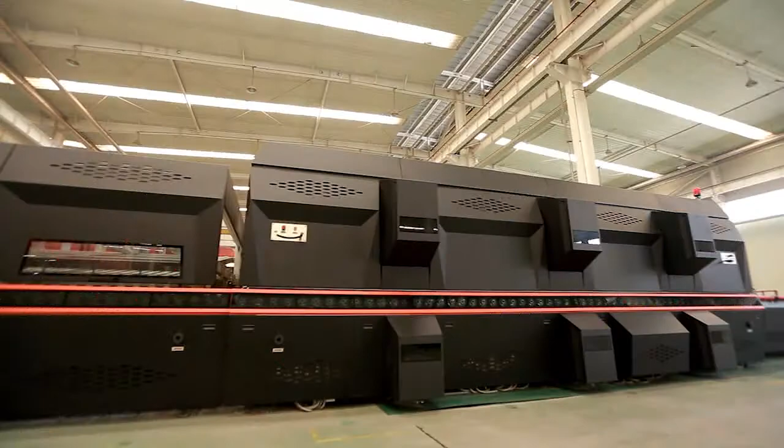As a worldwide leading manufacturer in the fields of glass deep processing equipment and deep processed glass, North Glass sincerely introduces our T-Series, Top Series glass tempering furnace to you, which integrates North Glass's 20 years of professional experience.

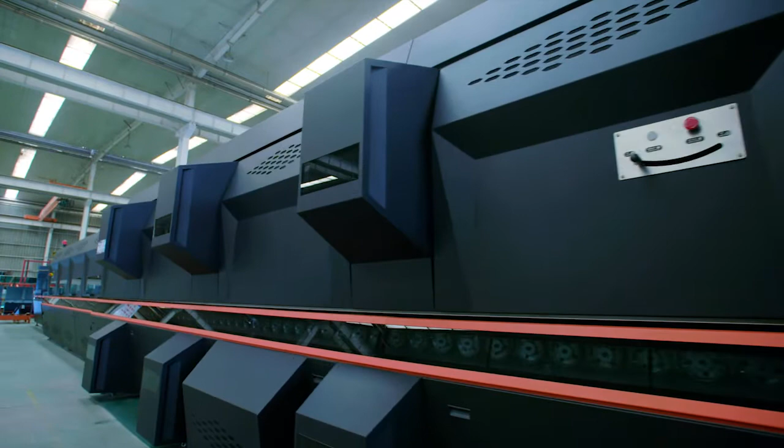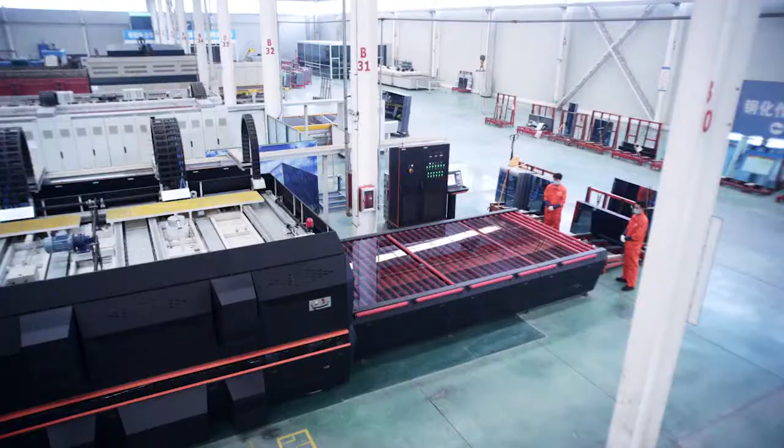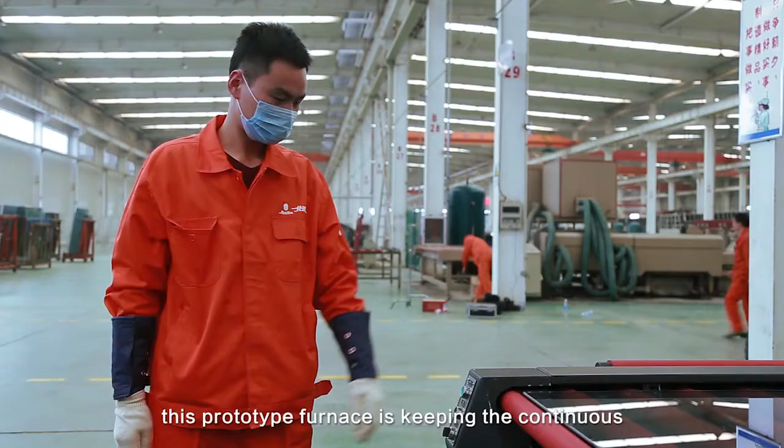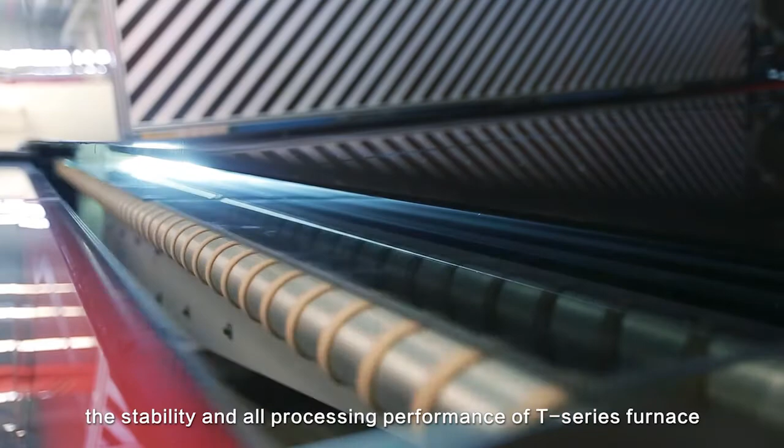North Glass started the research and development of the T-Series glass tempering furnace in April 2014. The first prototype furnace was produced and shown in April 2015. Since June 2015, this prototype furnace has been in continuous commercial production testing at the Luoyang North Glass production base. According to this verification test, the stability and all processing performance of the T-Series furnace have reached the expected targets.

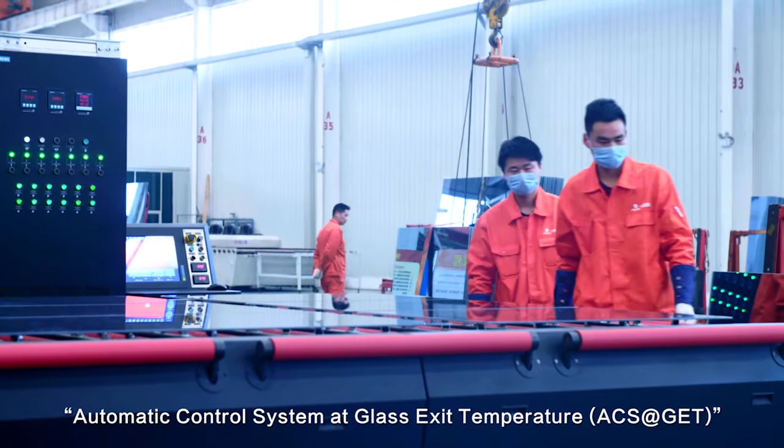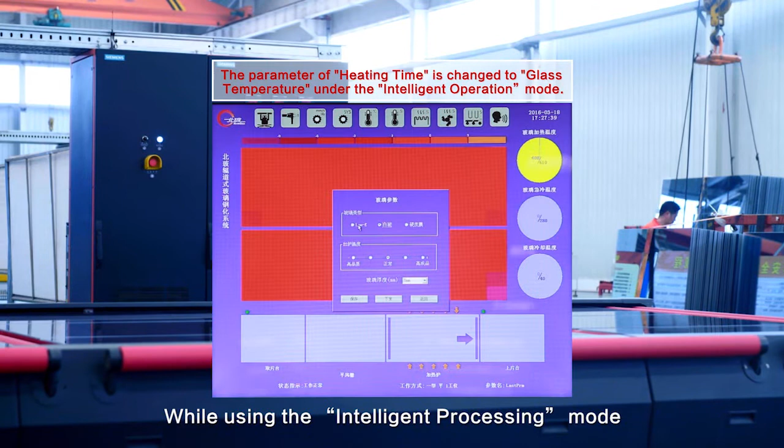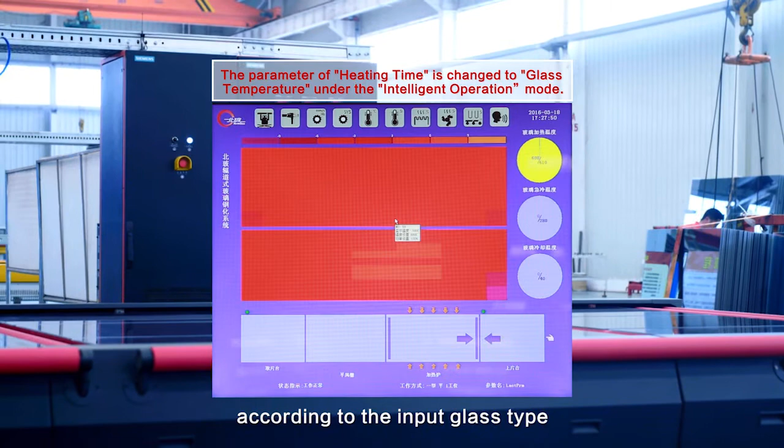The T-Series furnace is equipped with a new concept, automatic control system at glass exit temperature, ACS at GET, which witnesses a technical renovation of heating control for tempered glass. While using the intelligent processing mode, the automatic control system will be activated. The glass processing parameters will be automatically set up according to the input glass type, thickness, size, and quality orientation.

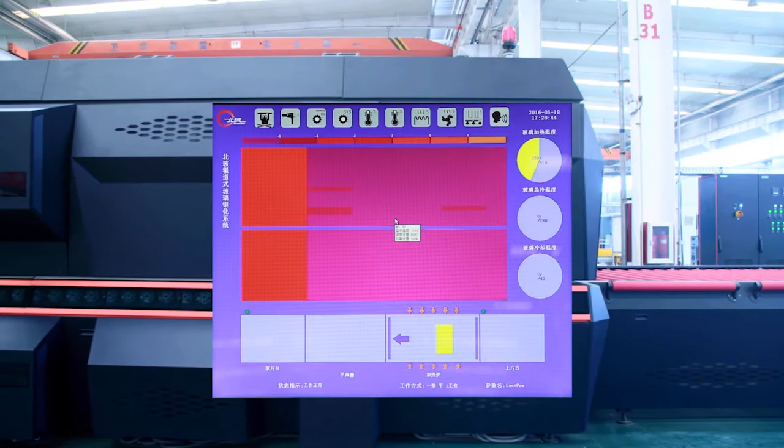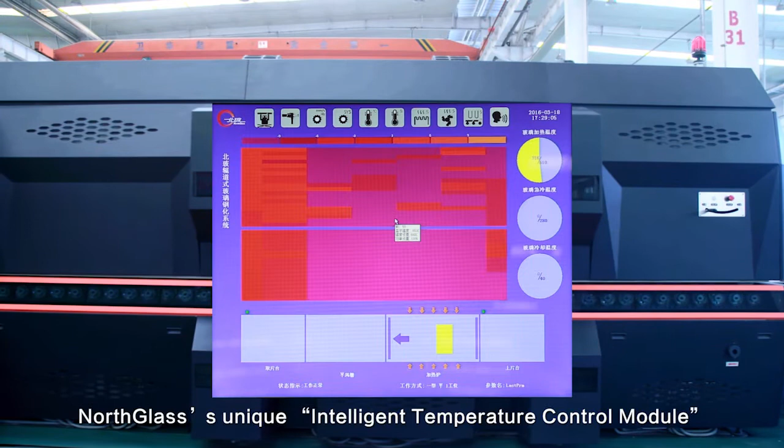NorthGlass's unique intelligent temperature control module can quickly and accurately detect and control the temperature distribution inside the heating chamber.

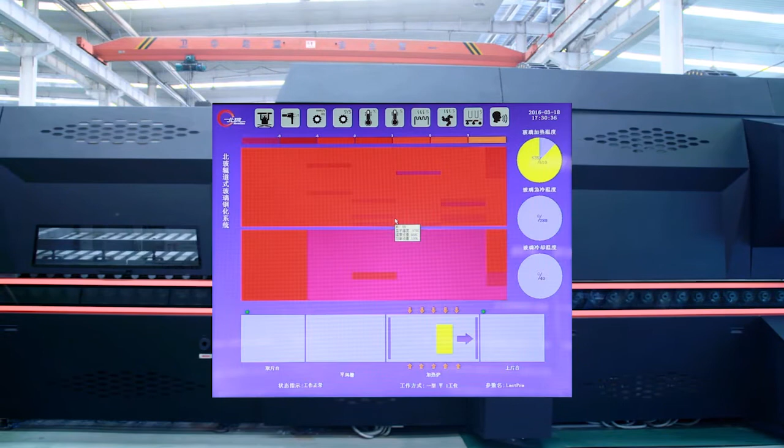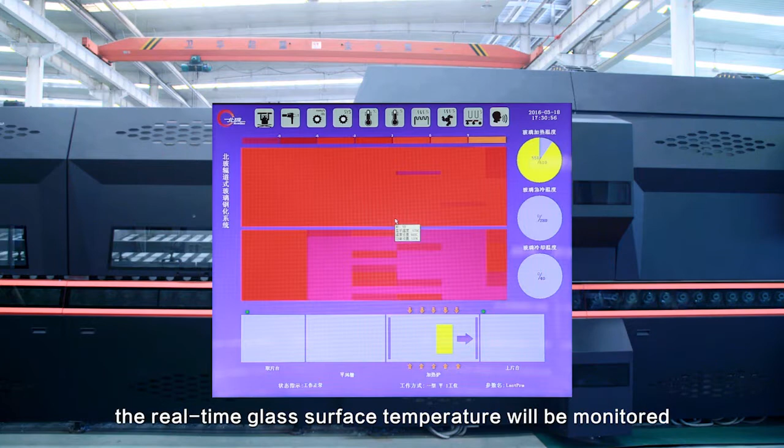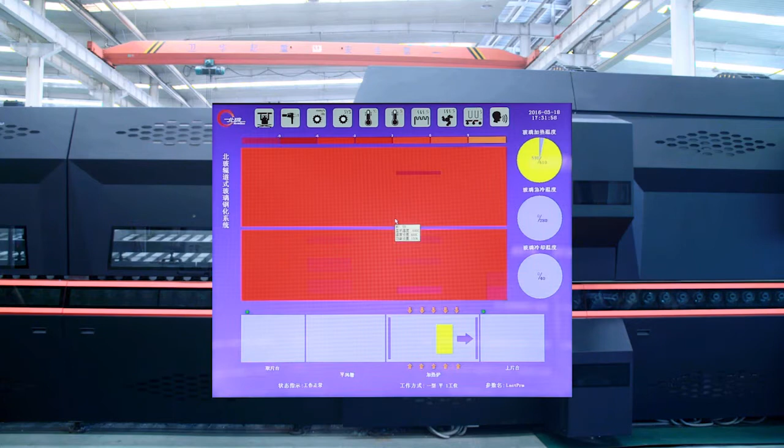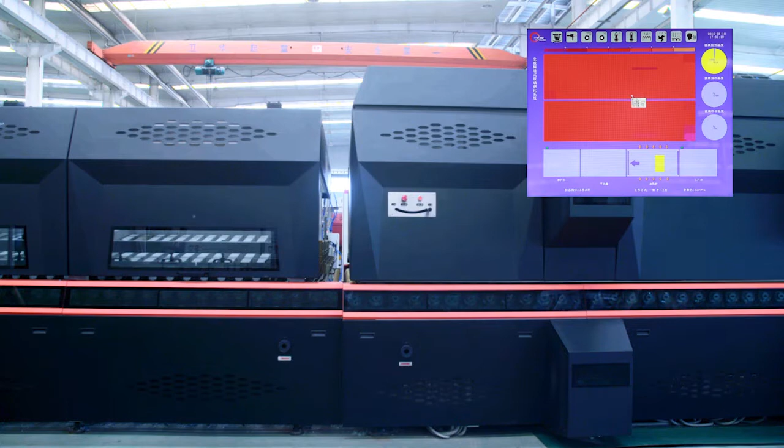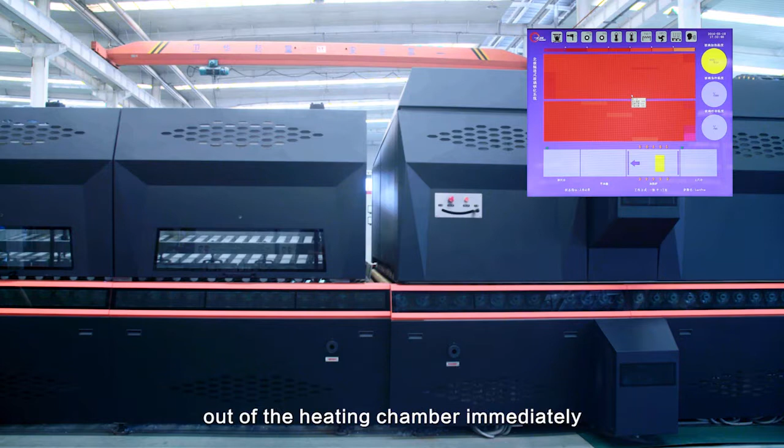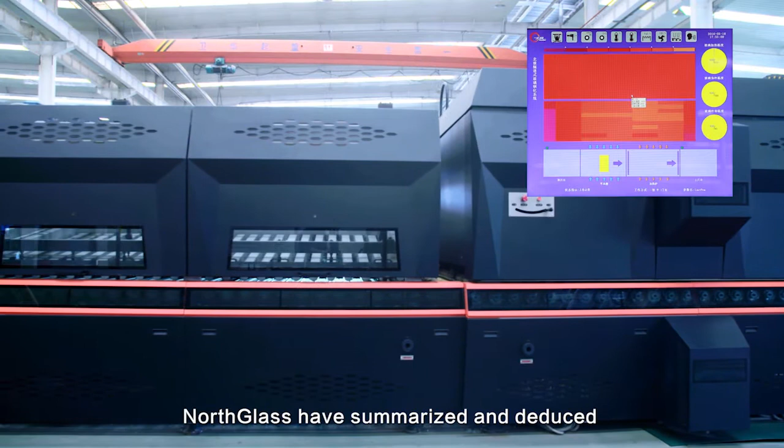When the glass surface temperature reaches the ideal one, the heating will be stopped and the glass will be moved out of the heating chamber immediately. Based on 20 years of experience accumulation and 1 year of trials, NorthGlass has summarized and deduced the function formula for temperature prediction. By using this function formula and real-time glass temperature monitoring, the glass will be moved out of the heating chamber exactly at the expected temperature.

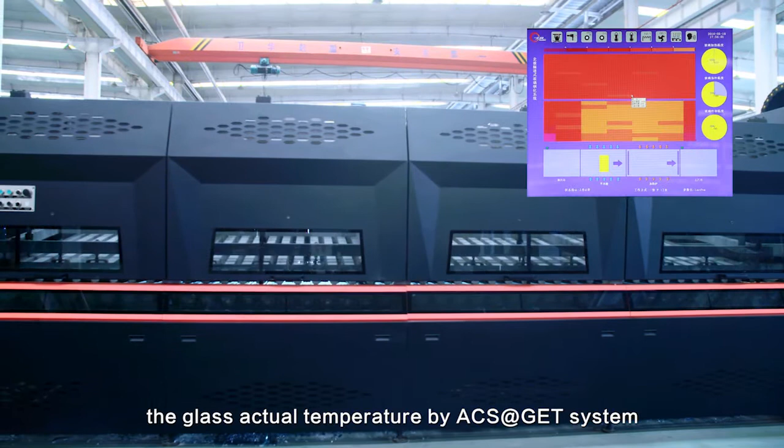Compared with the traditional heating control method, which works indirectly via setting an empirical heating time, the heating control via the glass's actual temperature by the ACS at GET system is direct and more accurate, which can significantly reduce the trouble and cost caused by repeated adjustments to find the best heating time. More importantly, the ACS at GET system can avoid heating deviation due to glass thickness tolerance, thereby significantly improving glass quality and production yield rate.

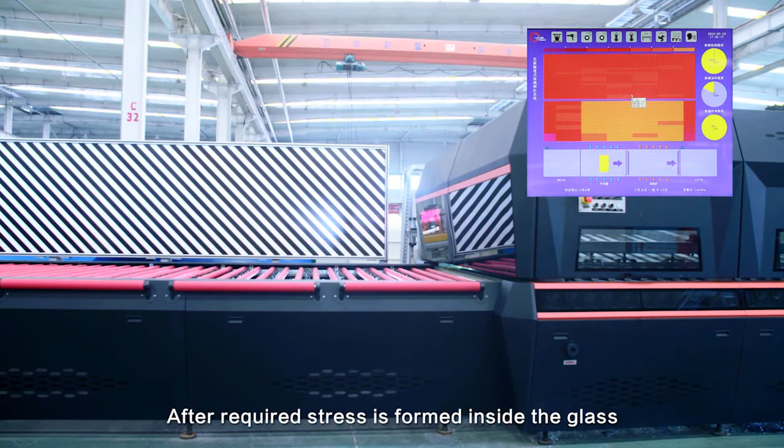The temperature detecting sensor on the quenching wall can instantly detect the actual glass surface temperature. After the required stress is formed inside the glass, the ACS at GET system will quickly adjust the blower inverter frequency to supply more efficient cooling, thus minimizing energy consumption while guaranteeing glass quality. When the glass surface temperature decreases to 40 degrees Celsius, the cooling process is finished.

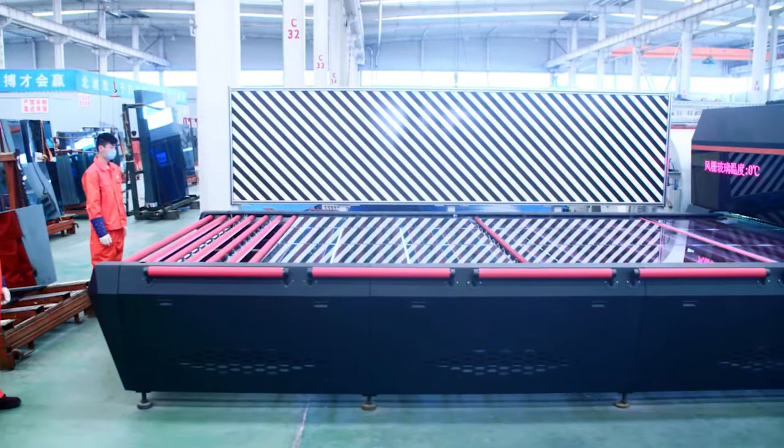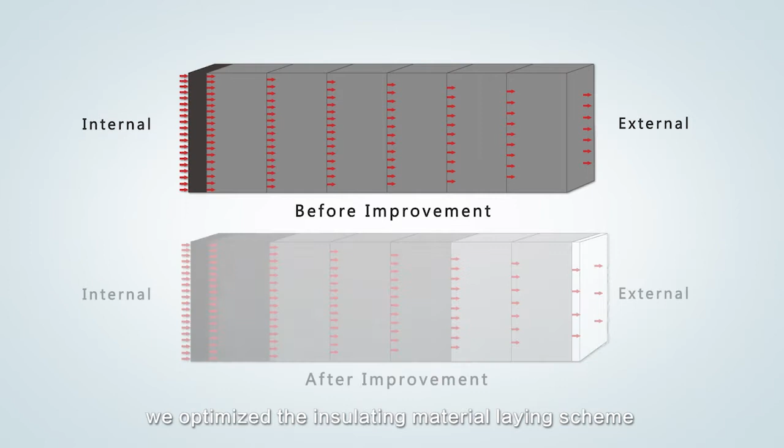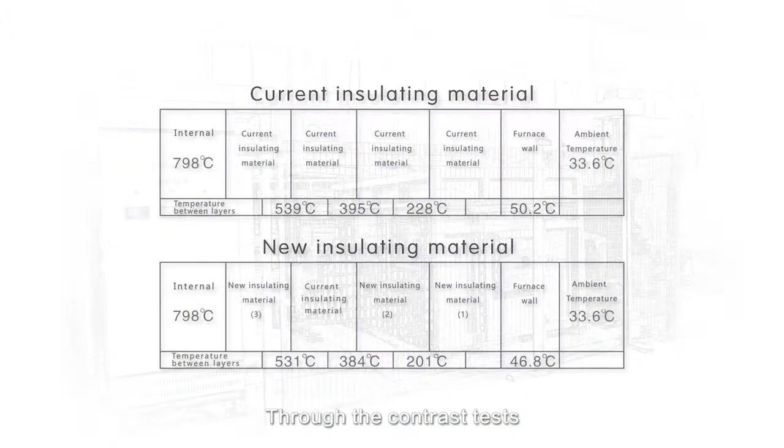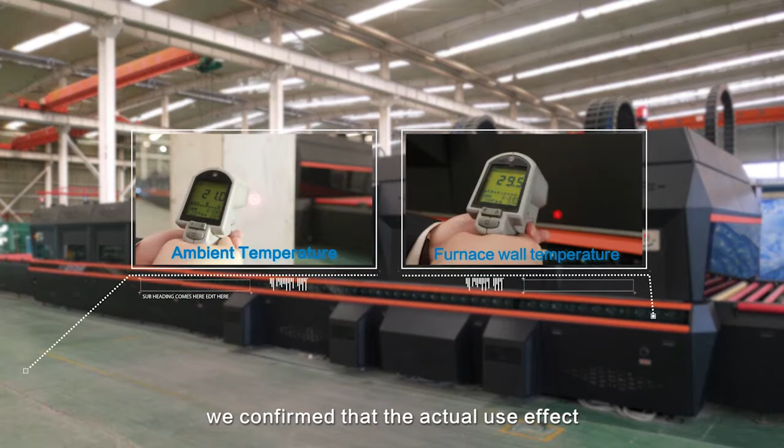Through thermal field analysis, we optimized the insulating material laying scheme with different performance layers to maximize the heat insulating effect. Through contrast tests, we measured the actual temperature data, which further verified our assumption. After statistical calculations, we confirmed that the actual use effect of the T-Series furnace had reached the expected target, which could help the user save an annual electricity cost of about $5,000.

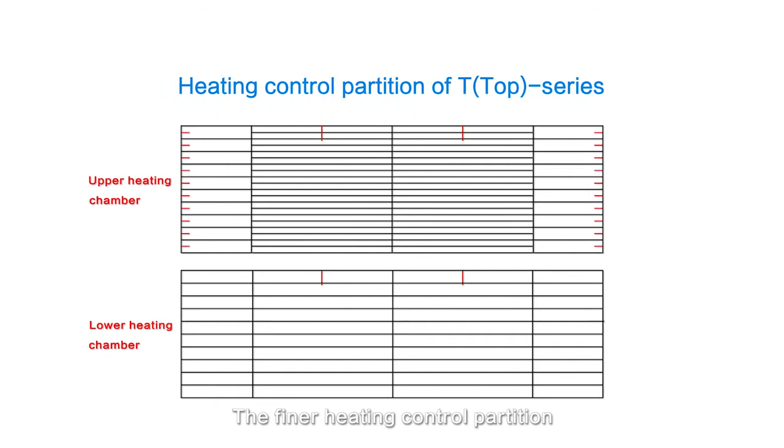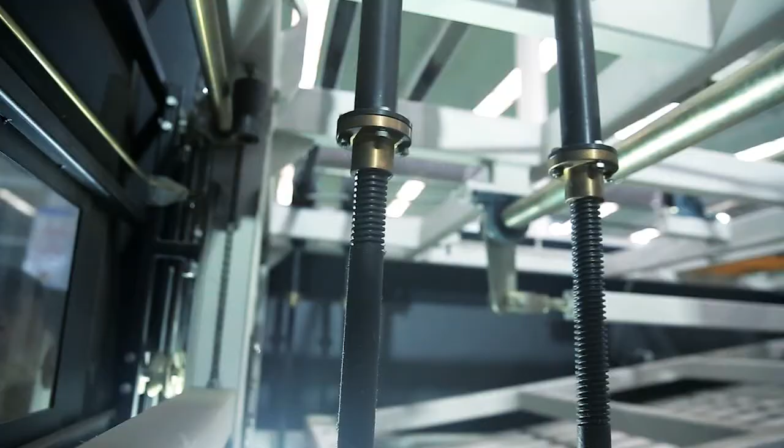The finer heating control partition makes the heating control react more quickly and the glass temperature control more accurate. Through fluid simulation, we optimized the quench wall design by eliminating air turbulence, making the quenching air pressure more even. The new design of the swing lid screw nut mechanism can improve the stability of glass flatness while guaranteeing the lightest iridescence.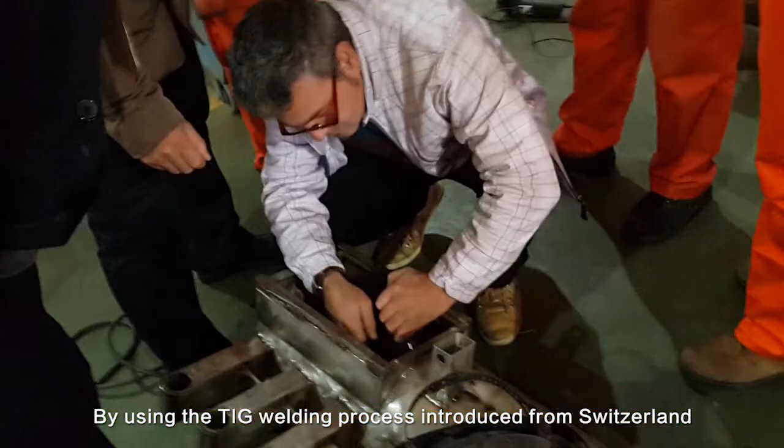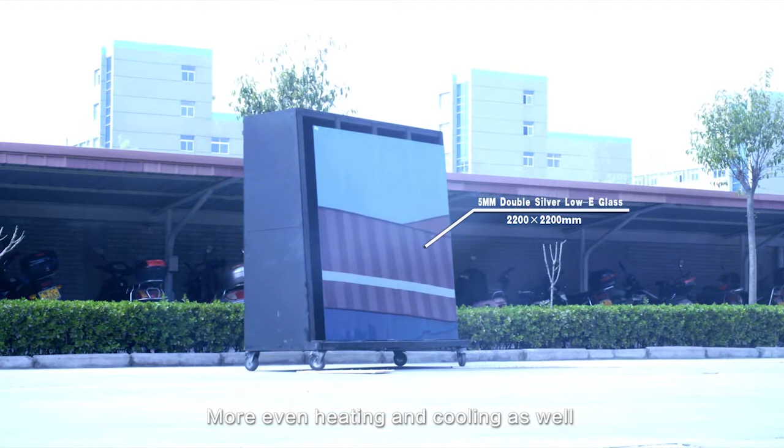By using the TIG welding process introduced from Switzerland, we successfully solved the oxidization problem in the heat-affected zone during heat-resistant steel welding, thereby significantly reducing oxidation slag falling inside the heating chamber. More even heating and cooling, as well as a cleaner heating chamber environment, bring the best glass quality. Seeing is believing. Welcome to check the improvements with your own eyes.

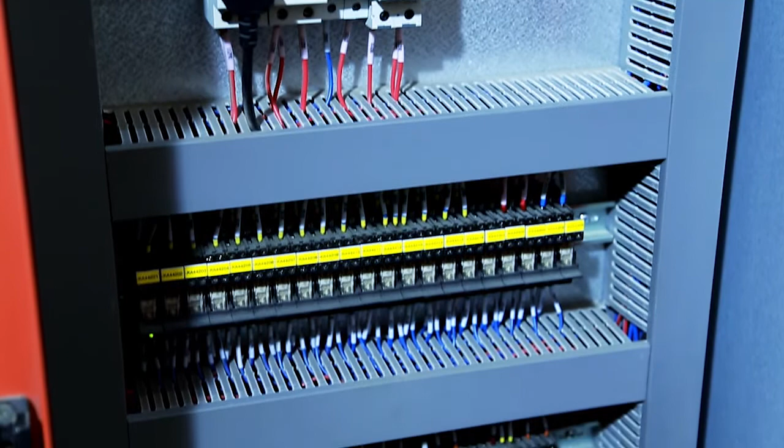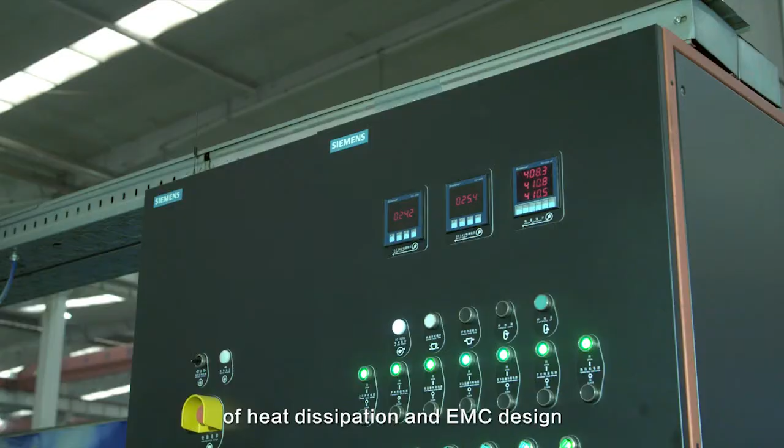The control cabinets and components originally assembled by Siemens have laid a good foundation for the T-Series furnace's stability. The IPC with book-type radiator eliminates your maintenance trouble. The reliability of the new control cabinets is ensured by using Siemens' excellent experience in heat dissipation and EMC design.

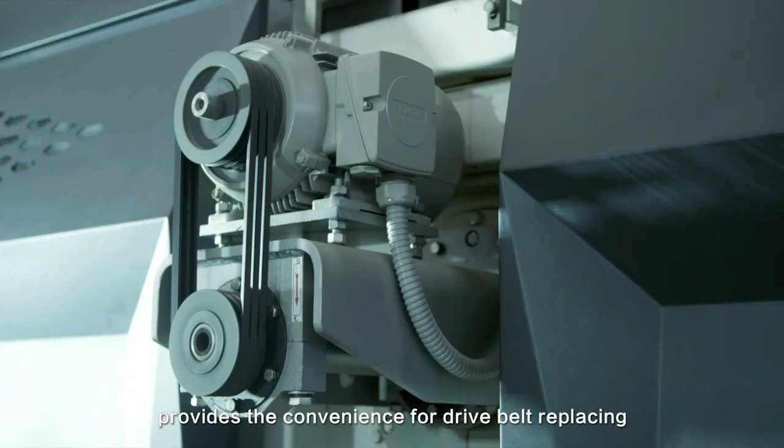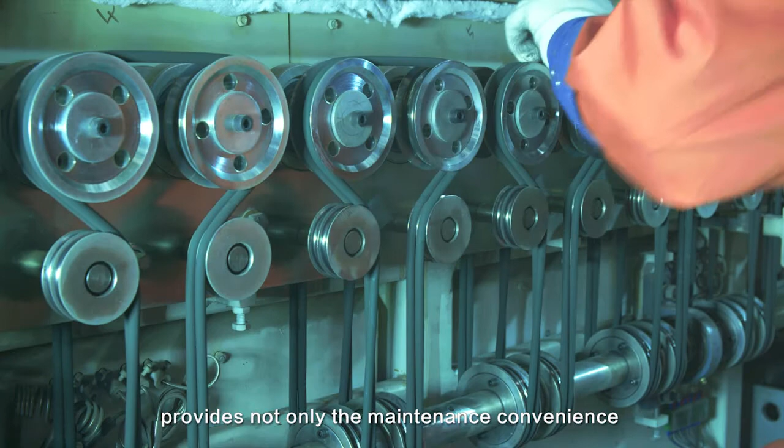The new structure design of the convection fan makes drive belt replacement convenient, reducing maintenance difficulty and improving the furnace's reliability. The new structure of rapidly replaceable double drive belts provides not only maintenance convenience, but also reliability to the transmission system.